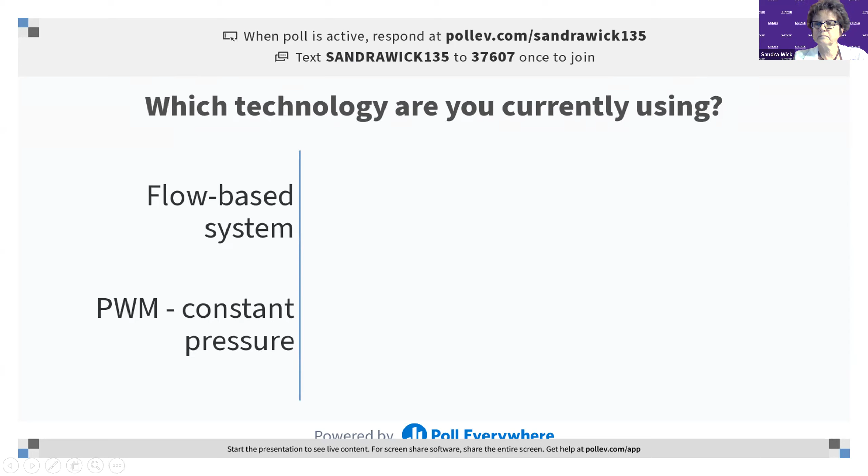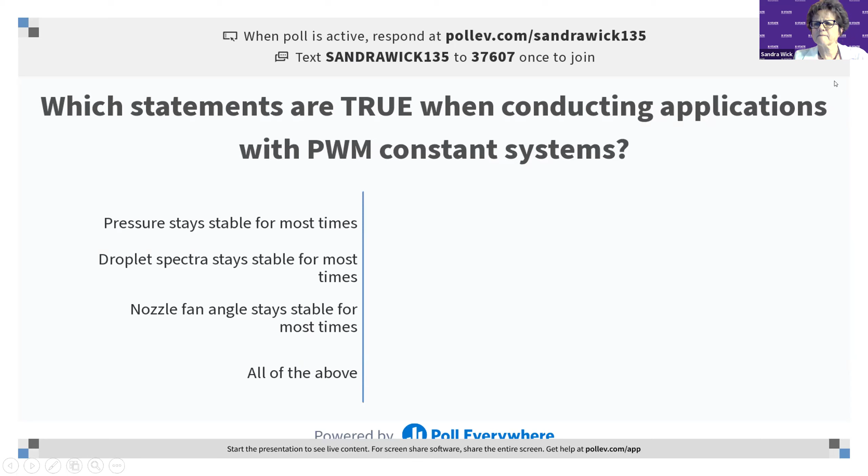So I'm going to get in there and see if I can get this to work here. Join that. Just type your name in. Continue. And then you answer one of those questions. So has anybody found them yet? Keith, are you in there? I'm in there, and I'm going to answer the first one. Oops, I didn't mean to go to the next one. Let's get rid of this. Whoops. I don't see anything coming in. How are you guys doing? If you just want to tell me, is it working or what?

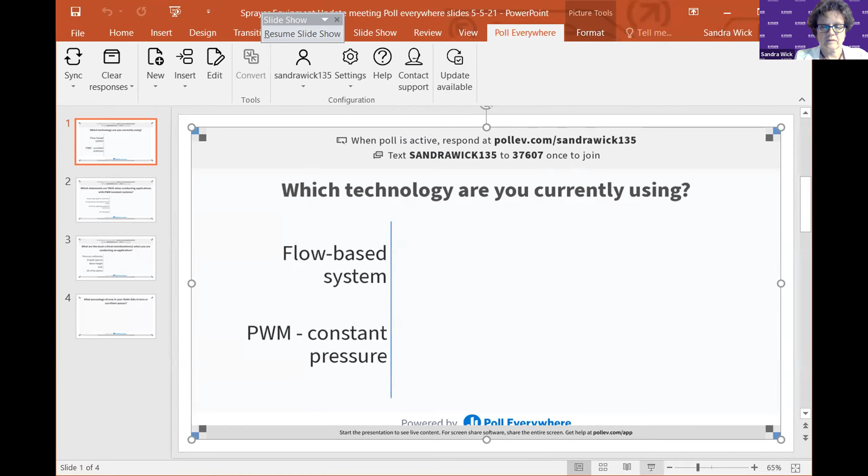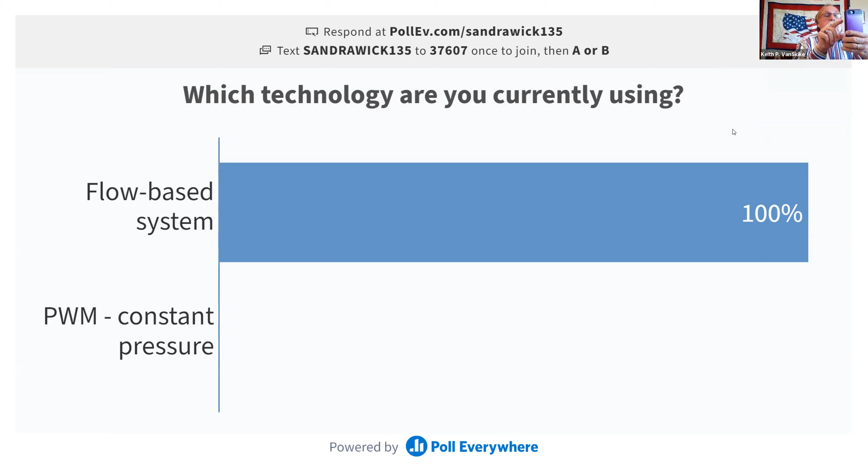Aha! Somebody answered it. I don't know. Activate. There. Now can you guys answer it? I had to activate it. Sorry. Are you guys seeing the screen? Yeah. Okay, great. I don't know if it's telling me how many responses, but I think there's about 7 or 8 people on. So that's how it works.

So it looks like all of you have answered flow-based system. Is that correct?

So I guess with that, we'll go on. I'll clear these responses and unshare. And then if you want to share yours, Ajay. Yes, I will. Okay.

All right. Can everybody see that? Yeah, now you just need to get it in a presentation mode. There you go. Cool. Awesome.

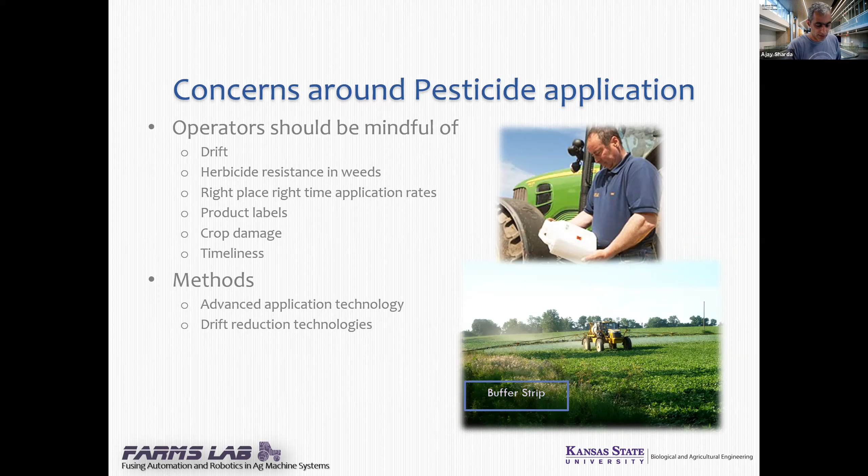Projects. I'm sitting here with the operator, collecting a lot of data, making sure that some of our nozzles on the left side, looking at the screen, they shut off because it's a buffer strip. I don't want to damage all that, and it worked, right? So that was one of the things from that standpoint.

I don't want to emphasize anything from a goal perspective. We want everything going, everything right overlap, all those things. We don't want any nozzles to be off. I want to apply the product at the rate I want to apply, throughout the field.

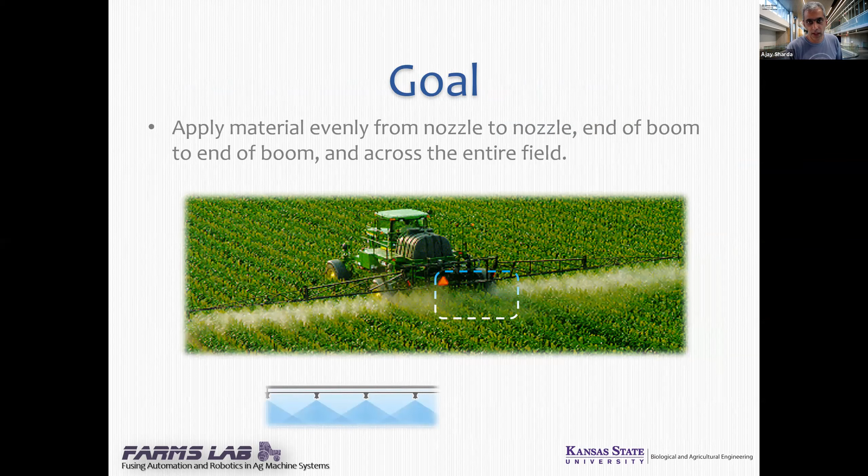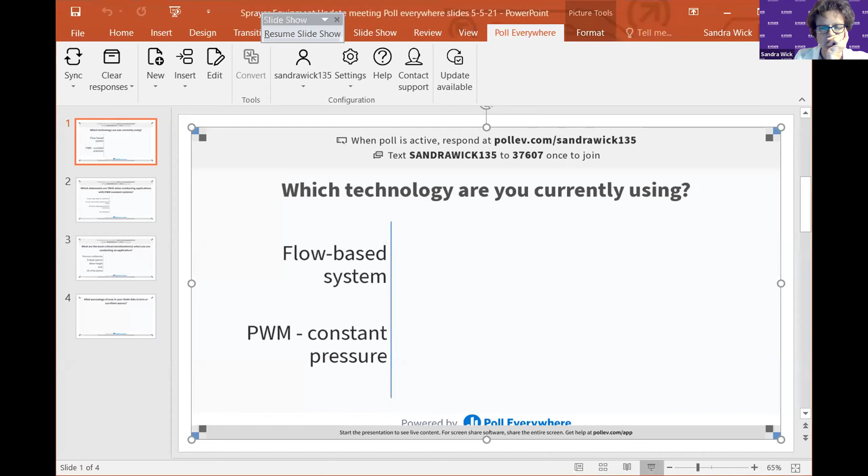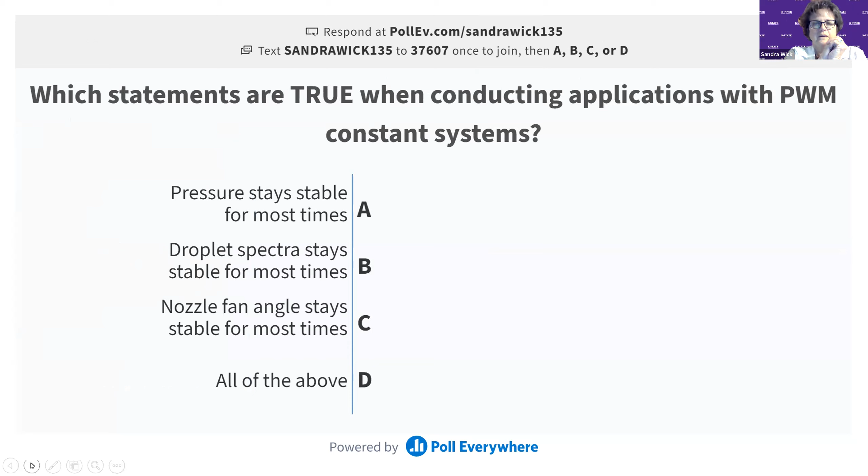So before we go to this slide, Sandra, can you please put up our next question for everybody? Yep, I will do that. So I'm going to have to stop your screen real quick. Please, yep. Okay. And then I will put this up. And hopefully we can get the second one to work. It'll work. It'll work. All righty, let's go up to the second slide and start that. Okay, sorry, next slide. Yep. There you go. So this is a multiple choice. Oops, next one. Yep. This one. Sorry. No, you're fine.

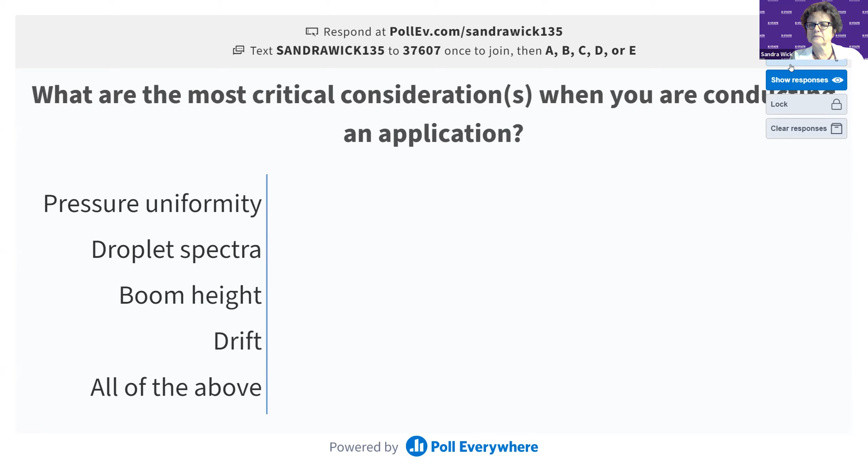Nobody's voting yet. Is it not working? Because I don't see any responses yet. Are you guys getting in? Can you guys hear me? I am not getting in. You are not getting in. Oh, shoot, that could be me. Okay, if you guys just want to put your answers in the chat, how about if we do that? Okay, that's good.

So you could use A, B, C, or D, or you could write it out. So A would be pressure uniformity, B would be droplet spectra, C would be boom height, D would be drift, or E would be all the above, or just type in the answer. So I'm going to stop sharing this since it won't work for some reason, because it looked like some of them submitted, but it's not going through.

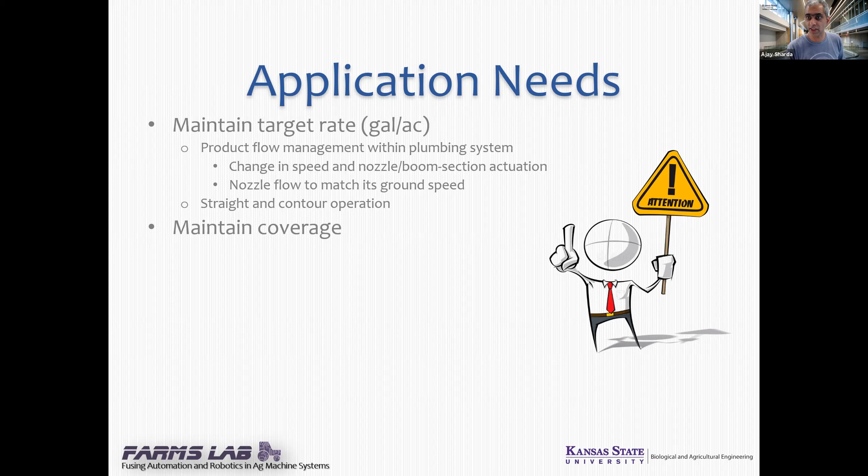The next second thing, to get my money back and all that, is I want coverage, because that's going to give me the control aspect of it, right? Now, to do the coverage aspect of it, the major thing in that is your droplet spectra. The one thing you just said, right? I want my droplet spectra to be right, and that, again, irrespective of speed. Well, you care, but the droplet spectra should not change dramatically going up and down the field.

Now think about it. Droplet spectra is directly related to your application pressure, since we all are using fixed orifice nozzles, and also depends on the overlap and all that part of it, and then to some extent the boom height as well. Now, my question to you guys is, since you said you are using a flow-based system, when I speed up, I have to put more volume in the plumbing system, more product out, and my pressure goes up. And same way, when I slow down, my pressure goes down.

Now that's one scenario in which, if there are ways of doing it, but I may be in a situation where I may not be able to maintain my droplet spectra. That's one thing which can happen. The other thing which is very important is the boom height, which is also part of the coverage. Because if your booms go high, and I really want to show you my arm, when we spray, my boom goes like this. Most of the time, this is my pivot point. And when my boom goes up like that, I'm not spraying straight down, I'm spraying at an angle, and sometimes into the wind stream as well. So all of these things are very critical.

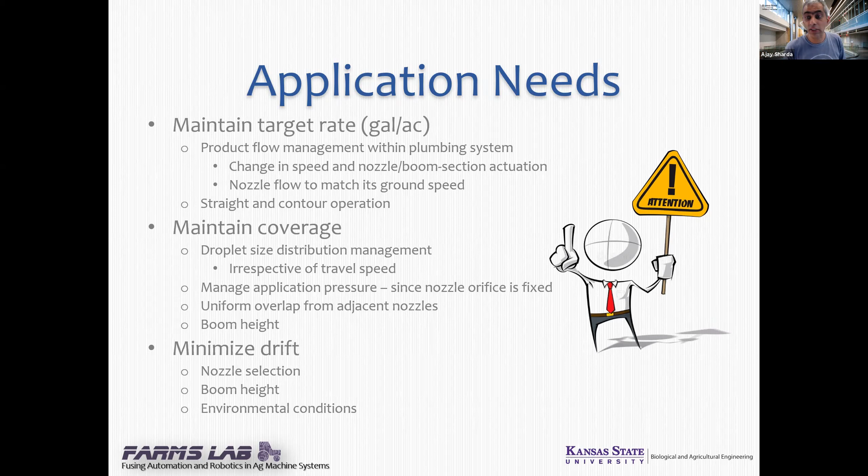So moving forward, very quickly, you guys have seen it. Flow regulation. What I have is I input my target rate. I have my ground speed going in, and my system catches in terms of what is my spray width, how many booms and how many nozzles are spraying. And what it does is it looks at the flow meter, right? It does all the calculation based on speed and spray width and my target rate. It says I need X gallons per minute into my plumbing system.

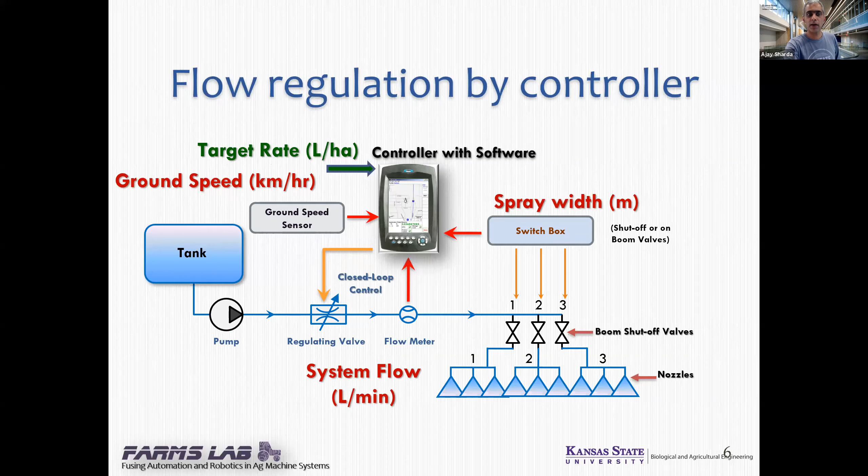And if this guy, the flow meter, says, hey, I'm up or down, then this field computer or ECU kind of a thing sends the command to my flow regulation, which is your proportional PWM valve sitting on the pump, right? That's very simple. That's all what we do. Now, I just want to put it up because we are laying a groundwork for some of the discussion which is going to come along.

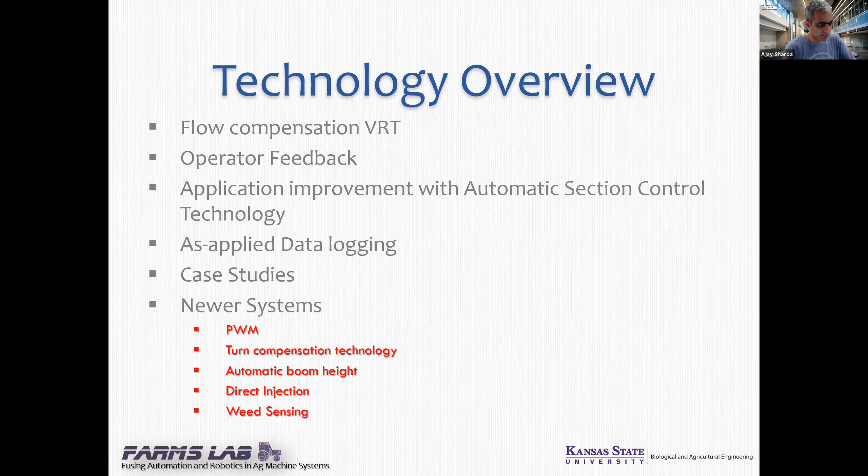Now, I want to show you this slide really quick. Focus on that picture. This is one of the things which we used to use. It is a rate controller for a flow-based system. I have a bunch of things going on. This is one of the sprayers we used to drive or operate. And most of the times when an operator looks at the screen or wants information in terms of what is going on, I look at this monitor and ask for information, what's going on.

And if you guys all are with me right now, the only piece of information which is available right now from these systems is, am I on target or not? All right. If I was supposed to do 15 gallons, am I doing 15 gallons or not? Or it will say you are at 15 or 14.5 or 13.5 or 15.5, something like that. So that's the only information which is available from these systems as of now. Now, some of these newer systems which show you the coverage map in terms of how you are spraying start to add some more component to it. But this is my source of information most of the time.

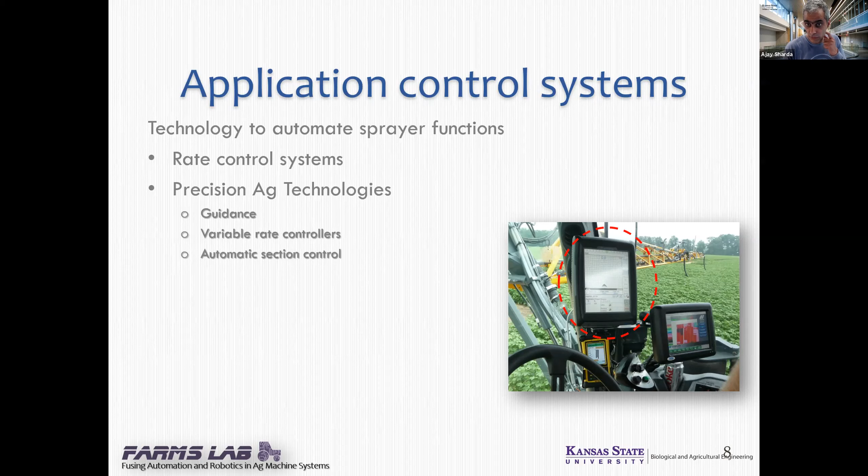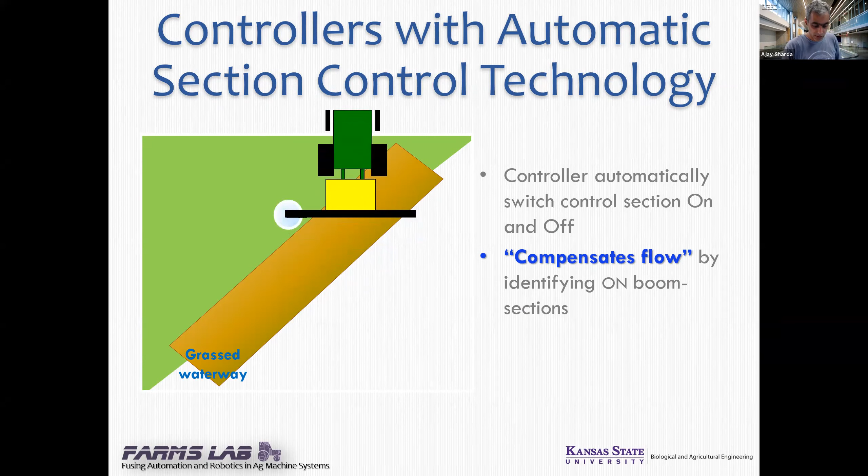Now, we won't touch much more on this thing, but I really want to emphasize how much automatic section control has come along. It is such a benefit in terms of automatically shutting off the control sections on areas which you have already sprayed or do not need any application, whether it is buffer strips, grassed waterways, and all that, so that you can minimize double application or waste of that product.

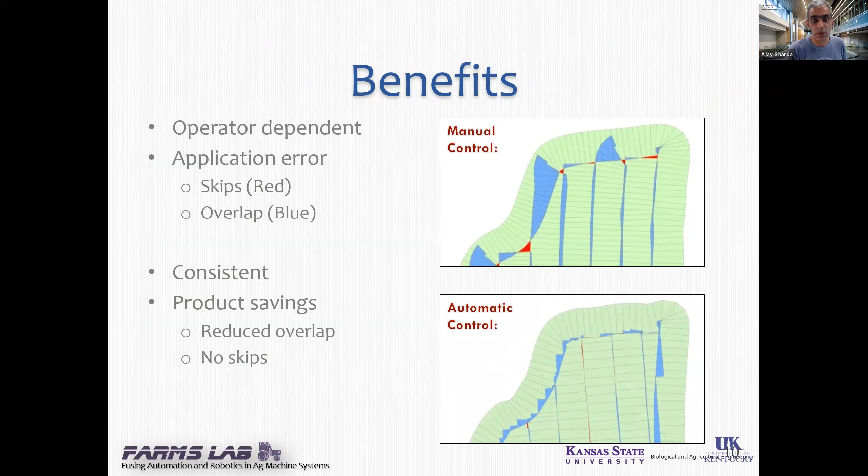Now, application data logging. All of these systems are giving a lot of data. All right. But I know, and you guys know, how much work and how much data we are handling on a day-to-day basis. But don't forget, you have this data in your back pocket, which can show what rates you really applied. Right? You can look at those things.

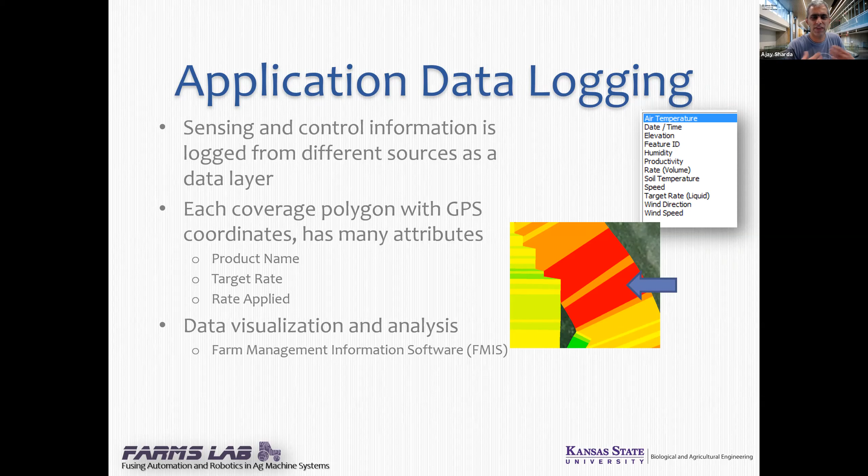You can look at what were your speeds, because what you can do by doing that is you can start to manage how your operators are driving. Are they driving too fast, too slow? What are the speed ranges and all that? And you can show this data to them to kind of educate how to implement this technology in the best possible manner.

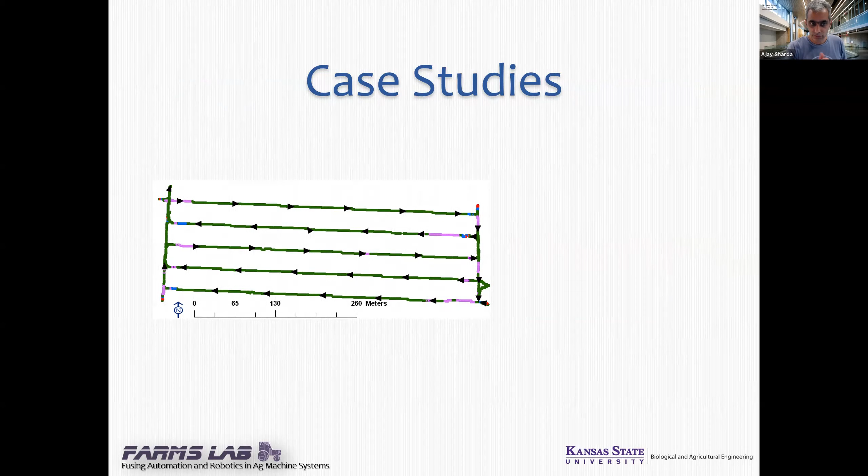All right. Now, getting on to some of the discussion I really want to do with you guys, I'm going to show you two fields. One field is a rectangular field, and another field is a more irregularly shaped field, and has a couple of electricity poles. There is a sinkhole here, a couple of grass waterways, and all that stuff.

All right. Now, what you are seeing here is the extent of off rate, meaning how much off I was from my target rate. Many people say different things based on talking to manufacturers and all that. People say that if you're within plus or minus 10%, you're fine, right? If you want to do 10 gallons, if you're above 9 and below 11, you are fine. You're in that range. Is there a kind of a margin in terms of improvement? Yes, there is. But here we are now.

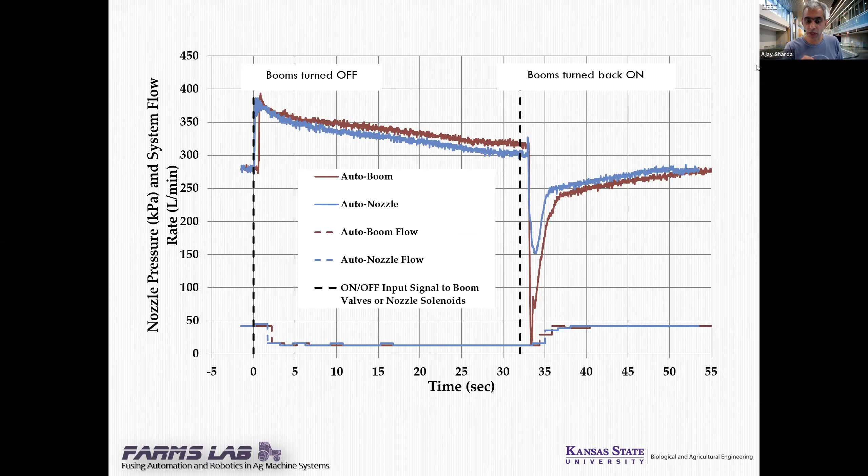Then whatever the pressure you want in that boom, you're never there. Say, for example, you want 60 there or 40 there or 30 there. It takes a while to depressurize and it takes a while to repressurize your plumbing system. And those are the situations where we see those under and over applications going on.

Now, granted, this is one system. There are other systems which are capable of doing better than that. But again, still there's a significant amount of time where I was doing over and under application. And even today, we will be talking something about the PWM and how the systems have really improved. This trend will still be the same.

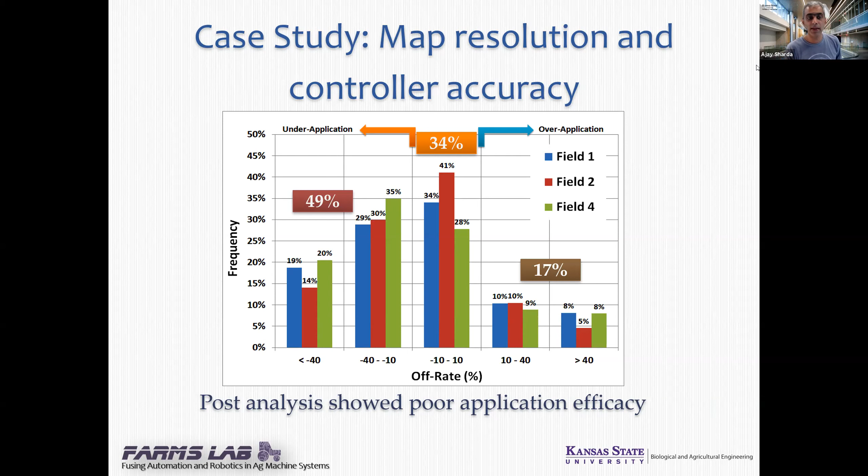That means your good application will go up, but you will still do a higher percentage of lower application versus the higher application. So we all know under application has a direct role to play in terms of controlling weeds. That's one way of managing the population of pests and everything. And if I don't do it, I am giving them an opportunity to be resistant or not be controlled from the critical limits to not get any yield penalty from that standpoint.

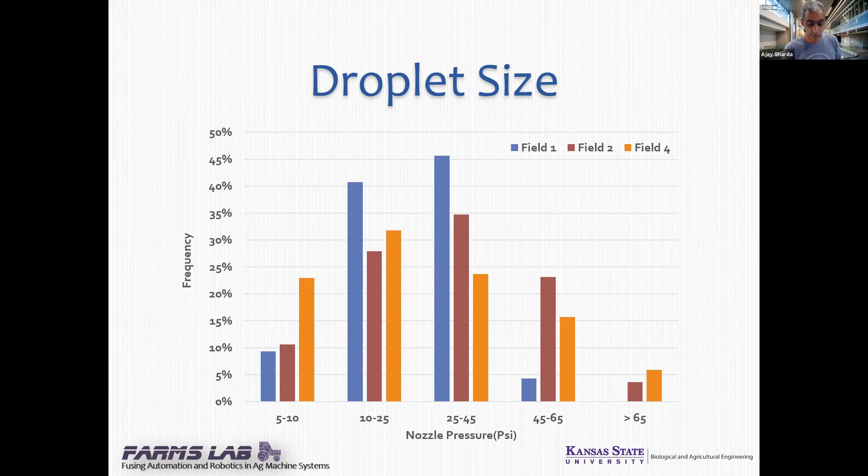But the moment you go out of that range, if you want medium droplets, you will either fall into the very fines, which is your higher pressure, or you will fall into the coarse, if you are very low pressure, right? So these are some inherent things which are related with your flow-based system aspect of it.

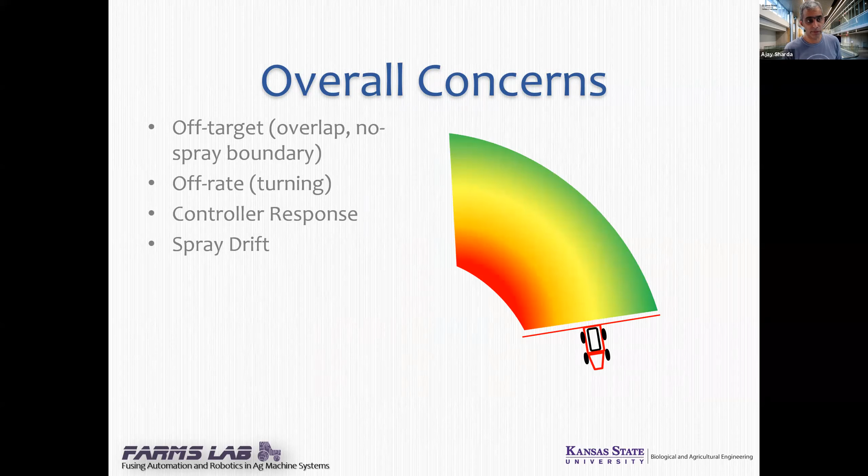Now, all of these concerns, whether it is off target, which is my overlap or no spray boundary thing, or my off rate aspect of it, this is fundamentally not possible in our flow-based systems when I turn, right? And we will talk about how much turning people do typically in fields. When you turn, your outside boom is much faster, your inside boom is much slower. You are going to do a very low and very high application from outside to inside. All right, and that's going to impact how you'll be managing and implementing our application. So this is definitely not possible.

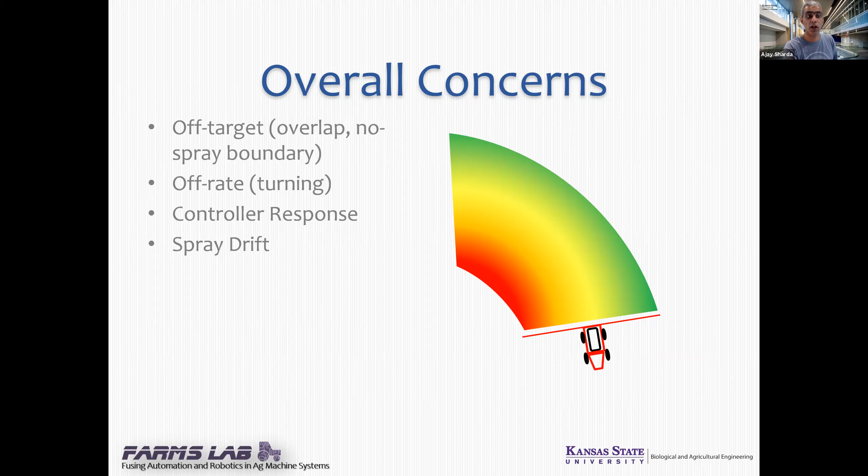We've seen some controller response where it takes some time for the rate controller and everything to bump up the volume in my plumbing system and bump down the volume in the plumbing system as well. Think about it. When you suddenly accelerate, or when you're doing some section control, suddenly half of your booms go off. How quickly do they go off? They go off within a couple of seconds. We're talking about 1 to 2 or 3 seconds.

All right. Now I'm asking my plumbing system to reduce the flow rate from 30, 40 gallons per minute to 20, 25 gallons per minute. It's going to take some time, right? So these are other things which are definitely related to that. And we've also seen that the way we apply product at those speed ranges, I'm going to have some droplet spectra concerns as well. So we've talked a lot about it, but on the flip side, I can do better, and the way I can do better is

selecting a nozzle which gives me a wider pressure range to maintain my droplet spectra. That's number one. Knowing what my speeds are to be in that pressure range, not trying to go too fast or too slow, so that I don't enter into situations of going out of my droplet spectra. That's the number two thing. And then obviously in terms of the controller response, my recommendation, that's my personal thing, is I would rapidly accelerate and get to my speed. I won't do slow acceleration, because every time you are doing smaller step changes in speed, you are trying to get your control system to work to slowly get there.

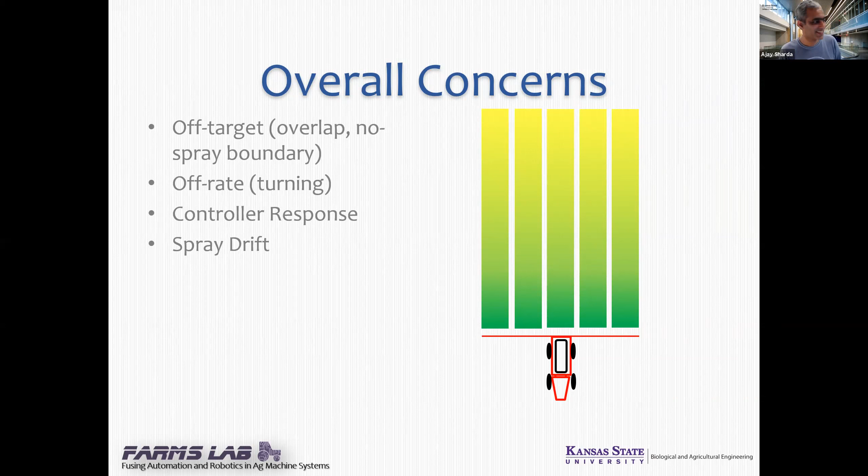And I can call you guys. We don't have many people. Craig, Robert, Dean, anything you guys think is on your mind? No? Are you guys still with me? Yep, I'm still here, Ajay.

All right, cool. So the next thing which I'm really excited about is PWM, or pulse width modulation technology. You guys have definitely gone through some trade show or seen this technology at one of the field events or a dealership or something like that. But the major thing is that now I have taken a little solenoid and put one solenoid in each nozzle body.

And so the way this system works is, the system pulses a certain number of times a second, right? Most of our systems are 10 hertz systems. There's a Deere system, which is a 30 hertz system. So when I say 10 hertz system, this system pulses 10 times a second. And within each of those 10 pulses, the longer it stays on, the more flow rate it can put out. So for example, if it stays on for all the time in that 100 milliseconds, you are putting the maximum amount of product. If it stays on for 50%, you're putting 50% of the product.

Now, very important thing, guys, here. Think about the entire flow control strategy. I have a flow meter, which is telling my computer how many boom sections or nozzles are on. It tells my flow control valve to bump up the volume. It again checks with the flow meter and keeps adjusting, right? All of those things happen. And then everything has to translate from upstream to the nozzle.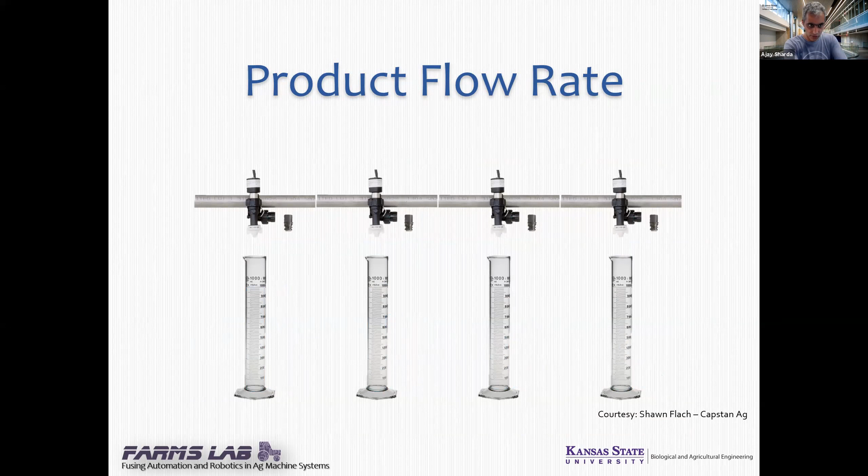Now, is that right or wrong? Let's see some of the information we have gathered over time. This is a quick simulation or illustration. So you'll see these jars. The first is 100% duty cycle. So if everybody is spraying for the same amount of time, a 25% duty cycle is going to put 1/4 of the volume, 50% is going to put half, and 100% is going to do full, right? So I can just change the duty cycle, and that will change my application rate.

But think about it. This is all based on speed, and what this gives me is that irrespective of what my speed is, I can maintain my 10 gallons per acre all the time, right? That's the expectation from this system. Now, if you guys remember, we talked about how the pressure changes if I switch off half of the boom or a portion of the boom and all that stuff, right?

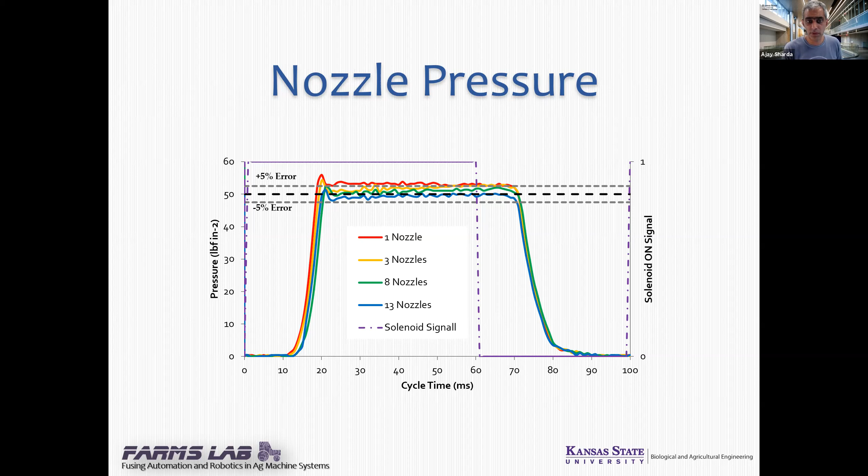One of the important things we learned from some of our initial lab tests, and we will see some of the field data, is that irrespective of how many nozzles are on, you always manage the pressure very tightly, within plus or minus 5%. That gives very, very high confidence going forward. If I can do that, I'm already doing a lot better. I have a lot of flexibility in terms of what I can do.

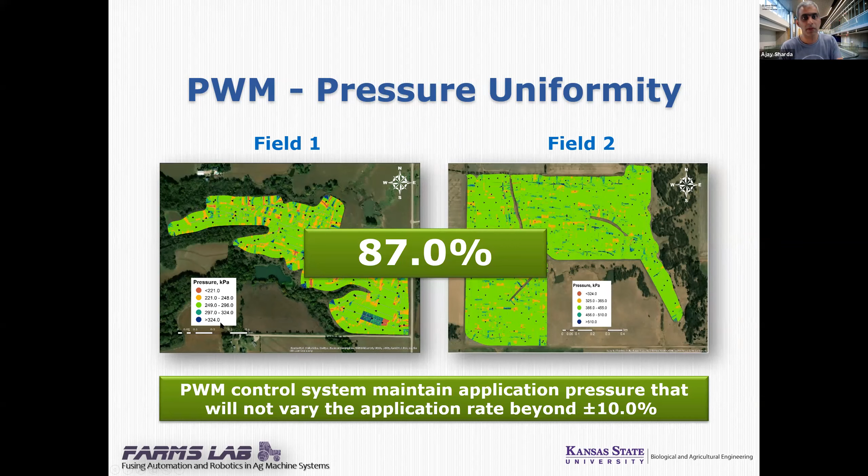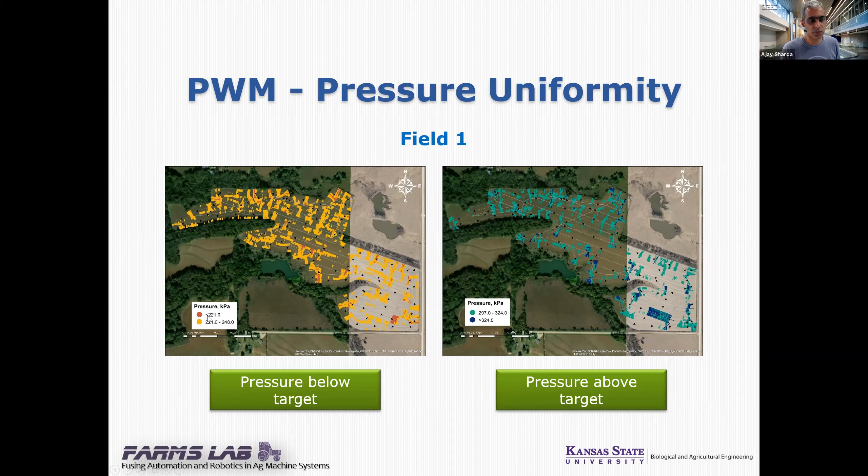So there were a lot of regions here where you applied over and under, but in most of these areas, whatever the 10 or 12% area was left, you can see in these percentages as well that you have slightly more under application than over application, but very few areas which showed beyond 10% of error, right? Which is such a big deal moving forward.

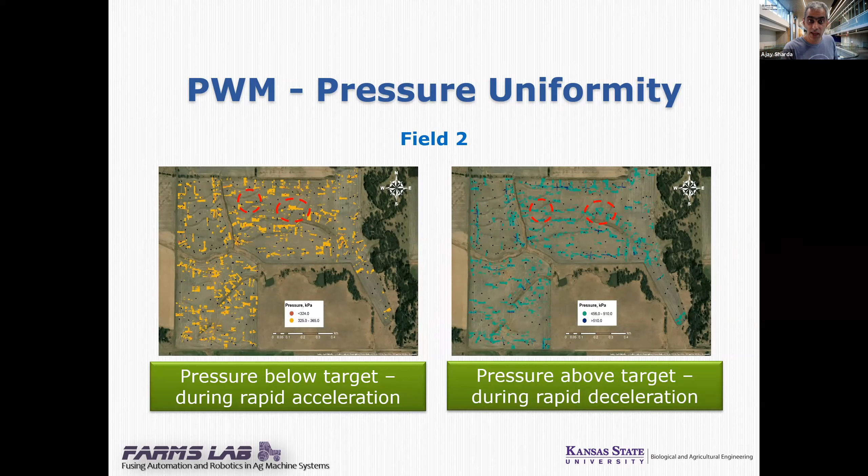Similar things happen here, and if you match what my speed was doing, every time I was slowing down or speeding up to go over the terraces and all that, that's where these errors were happening, because I was rapidly slowing down and rapidly speeding up. Similar things to what we have seen in the flow base, but at a much lower magnitude. Now I want to ask this question, and this is a question for Sandra and Keith as well. Have you ever heard about what pressure coefficient of variation is?

We have heard about coefficient of variation in terms of my seeding. What is my singulation? When we are planting, we always talk about coefficient of variation. And I'm pretty sure you guys plant and all that. From a planter perspective, I want my COV or coefficient of variation to be definitely less than 33% for good seed spacing, or from good systems, I expect them to be somewhere around 20%.

All right. So have you guys heard about what the pressure COV is? Keith, Sandra? All right, no. All right.

So I want you guys to start thinking about this now, because when we say coefficient of variation of pressure, in my previous slide, we've seen what my pressure ranges were. Now, from a COV standpoint, I want to know, for each of my booms, or all the nozzles within each boom, where does the pressure stand? Because my goal is to maintain whatever 50 psi here in this field was, but I want that 50 psi to be all along the boom, consistent at all times.

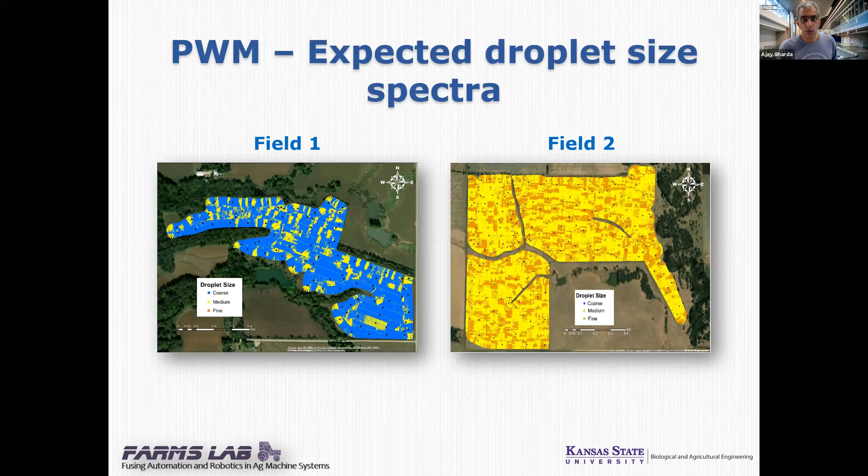So now what I'm going to show you is another slide here. Remember we were talking about droplet spectra. I purposefully skipped the last slide for a certain reason, but if I select the right nozzle, now I selected a right nozzle in this case, which gave me a 20 psi range to always stay in my target pressure. And you have to select a nozzle which has a 20 psi range from your target rate. Say, for example, 50 was my target. So somewhere between 40 to 60 psi, I should always get the same droplet spectra, or if it is something wider than that, even better.

So if I selected the right nozzle, with everything I did, I wanted to maintain medium, and I always maintained my medium droplet size. So think about this: switching to my PWM, I have a 10-mile speed range. I can manage my pressure a good 90% of the time. My pressures were consistent from nozzle to nozzle, from end to end on the boom, within 5 psi all the time. So if everybody is going up and down a little bit, everybody was right there. There's nothing like one was too high or too low, right? So that's very important from each boom perspective.

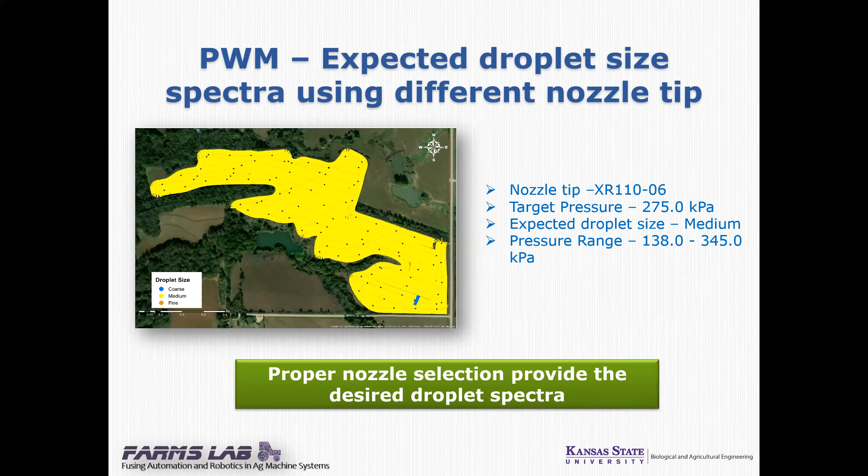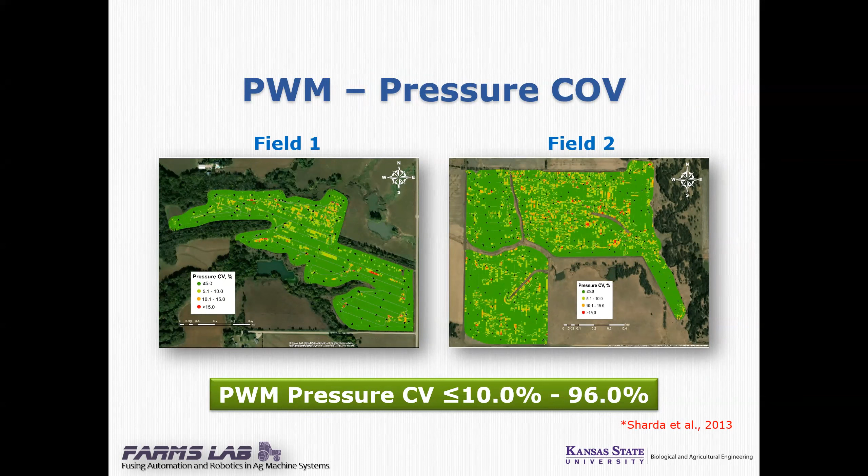Yeah, it's Keith. So really, that variance, it is repeatable for each nozzle going across there. I mean, that's what you're getting at, is what, 96%. That's very, very similar and repeatable all the way across, right? Absolutely.

Yes, sir. And the way we did this is that we put two pressure sensors in each boom, and we put those pressure sensors strategically, one right at the T where the product gets into the boom, and one pressure sensor towards the far end, just to capture where the product gets into the boom and all the way to the very far end, in terms of seeing whether the pressure was building right or wrong, right?

So we calculated these CVs on a boom section by boom section basis and combined all that together. So everything looking together, this is what you have seen. The field on the right is 140 or 160 acres. The field on the left is 70 acres. This data is at 40 hertz, means I'm collecting 40 samples of data every second.

And one more thing I want to emphasize is that this is a very high resolution map. This is a map which has been plotted for all 36 control sections in that sprayer. So you are seeing every single section's behavior in this map. I'm going to show you another slide here. So this is one example, right?

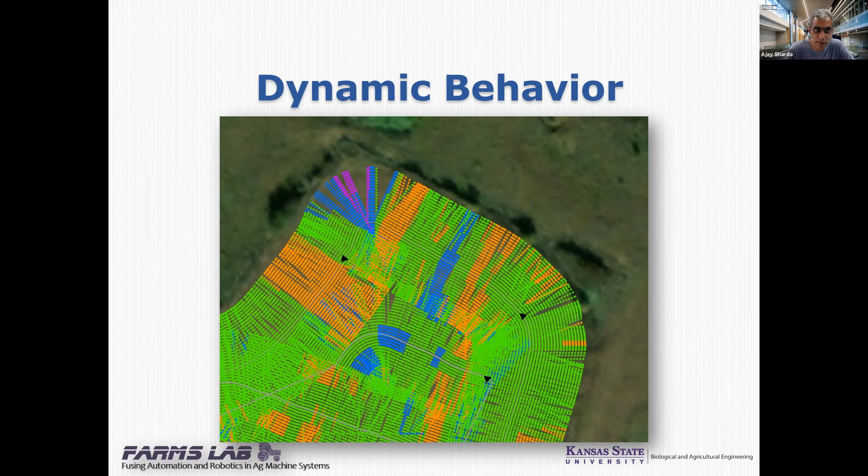You can see on these turns that it turned on here, but there was some gap in the distance when it turned back on because the boom moved too fast. And my duty cycle was definitely not matching up and all that stuff. And we won't go in that detail. What I want to quickly emphasize is that I only want to show this slide because I want to talk about something else. We are shortchanging on time here.

On a flow-based system, we cannot manage that kind of a speed, because if we manage that kind of a speed, we will go from a very high end of pressure to a very low end of pressure, right? We will be in areas which are below 10% and above the 10% as well. So this is what is happening in this case. You can do it, but then you have to really manage your speeds well. You cannot drive that fast, or you cannot drive with that speed range.

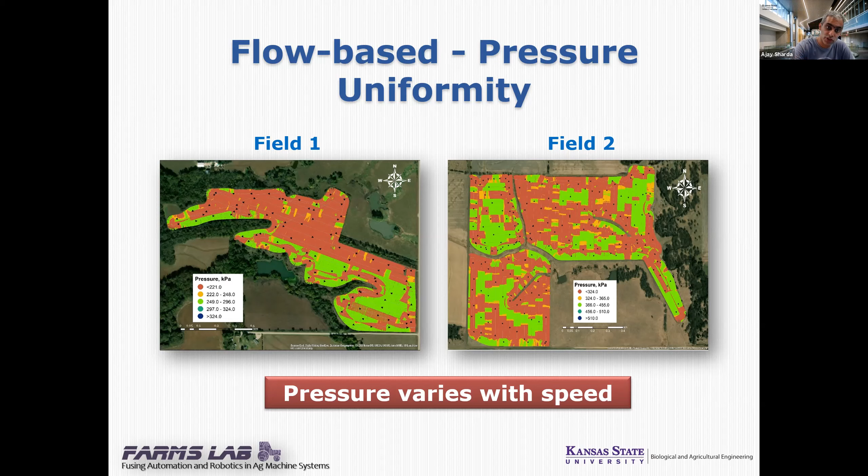And if this is the case, in terms of pressure, you won't be able to manage your droplet spectra as well, because you're going to go from fine to medium to coarse based on the nozzle we selected in this case. All right.

I'm sorry I showed this. So Sandra, can you ask the fourth question to everyone? It's time to ask question number 4. Okay, so I'm just going to have them put that in the chat. Whoops, I used the wrong one. Stop share. Let me find my PowerPoint here. I don't know what happened to that, but that went down.

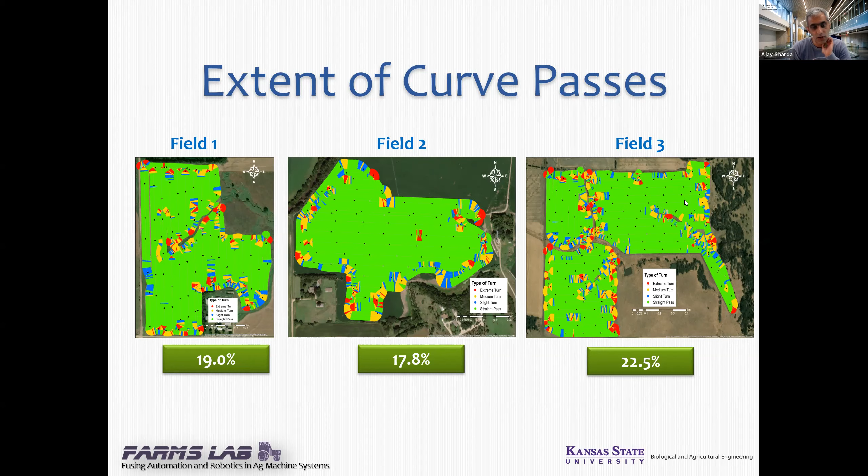So we have to be very cognizant about what this technology is giving me in terms of turn compensation as well. We haven't done much work on that, but my guess is that these systems are managing duty cycles correctly as they are going around. If that is the case, then I am managing my duty cycles all around these curves and keeping my application rate consistent, not only in the straight passes, but also in the curvilinear passes as well. All right.

Now, this is what you will see in terms of speed differential. Extreme turns: the inside could be 2 or 3 kilometers, and outside could be 45 kilometers, right? That's a huge speed differential. Even at your 20 to 50 meter turn, you still have anywhere between 34 to 15. So that's a pretty large speed differential as well. So big picture, we cannot do that.

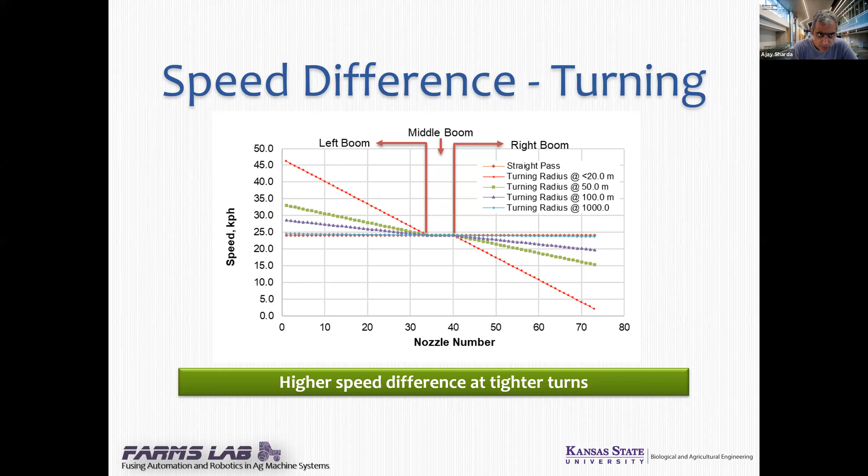All right. I quickly want to wrap up this thing. From a comparison standpoint, you can do good with flow based, but you have to make sure your speed is in a good range, your pressure doesn't vary too much, and your droplet spectra stay the same. But there is limited control, because everything is controlled by your speed. On a PWM, you get a wider speed range, and you keep your pressure constant. We can manage our droplet size. And we have also seen you have an advantage on turns.

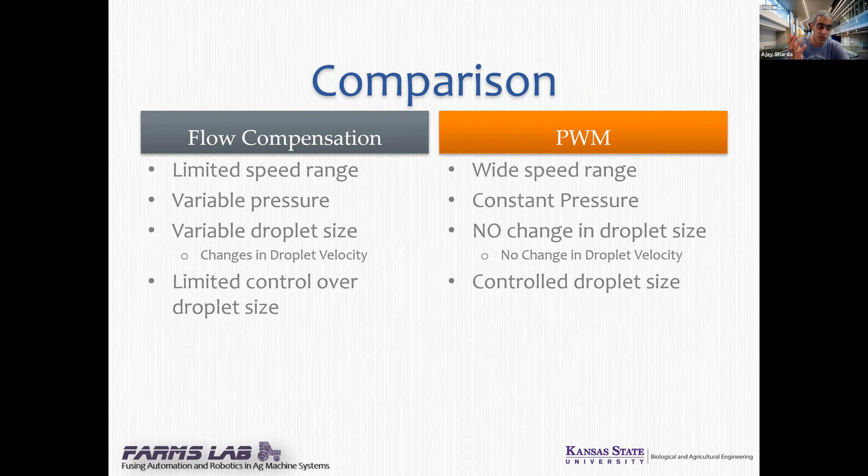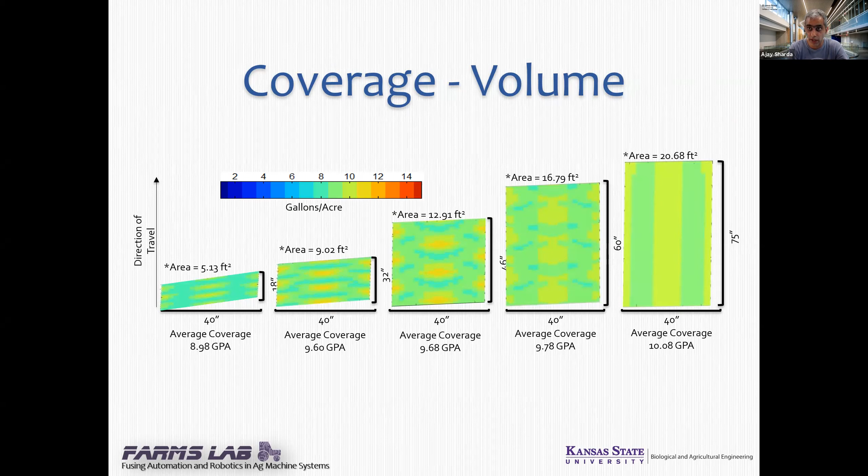We have seen that from that standpoint as well. This is just a simple, very quick thing. We haven't done much. We are on the cusp of doing something in 2 weeks, which will be all in the field. But some of our lab studies have shown that if you stay above 50% of the duty cycle, your coverage is going to be much better.

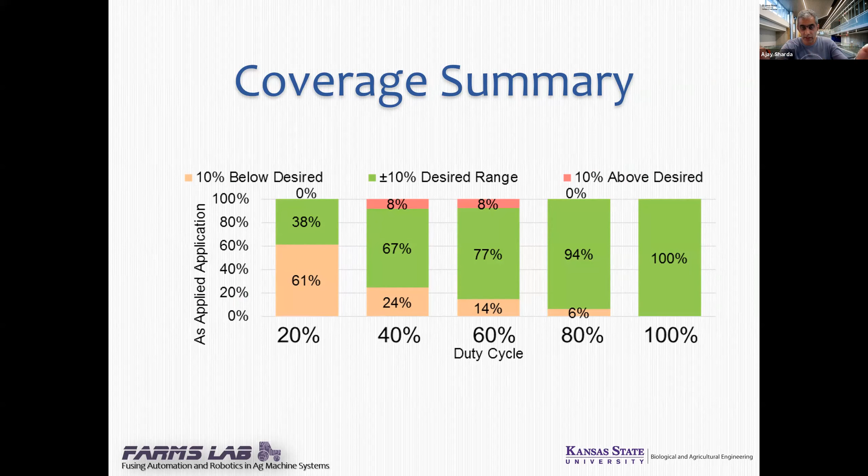But I'm eager to do the field study, which we are planning in 3 weeks, and we will know a lot more about the difference in coverages at different duty cycles, plus 10 hertz systems, which is everybody else, and the 15 hertz system that Deere has. So we'll try to share some of those things.

The last thing I want to talk about: boom height. Very important, guys. We have to make sure our boom heights are always consistent. If they go up, we are going to be out in terms of overlaps and coverage. And like I said, always remember, my boom goes up and down on a pivot point. So if it goes up like that, I'm spraying now at an angle versus down, right? So suddenly you start to lose a lot more product. It's not going to end up on target.

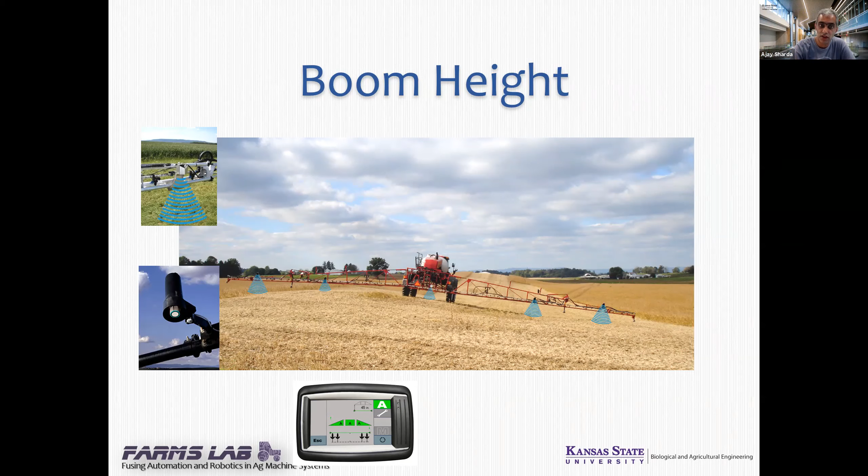And there are a lot of good presentations from Dr. Greg Kruger at UNL which talk about wind speed as well. An additional 5-mile wind speed can blow your droplets a very long distance. We're not going to talk about that. But the last slide for everybody: what you see here is I mounted 3 different wind speed sensors, and I mapped them side by side.

So this is my one pass going up, which are these colored things, and this is a pass coming down. This was my wind when I started in the morning, which was northeast. But within a span of 4 hours, it completely flipped and started blowing southwest. And now when I was going southwest, with the speed of my sprayer chassis and the additional wind component blowing from my back, my effective wind speed was 23 miles per hour. And when I was going up, I was in the mix of 5-7-ish miles as well.

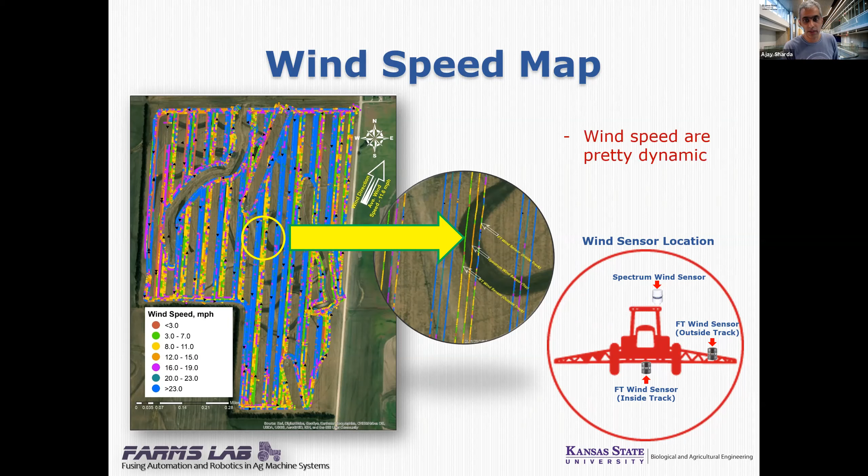So one pass, I do a really good job on application and expect to have good coverage. On the other pass, I have no idea where my droplets are going. 5% landing on my crop or 10%, but it's all over the place. So this is something we have to live with because of the way our fields are set up, but we have to be conscious about wind. Wind is one of the biggest factors for drift. If you add any kind of poor boom height control, it could be really detrimental from that standpoint.

So I would really want to acknowledge some of the people who have been helping a lot on the back end: CNH, Raven, and TeeJet. Most of their help is in terms of technical expertise, so that we can tinker around in their systems and get some really good quality data for you guys.

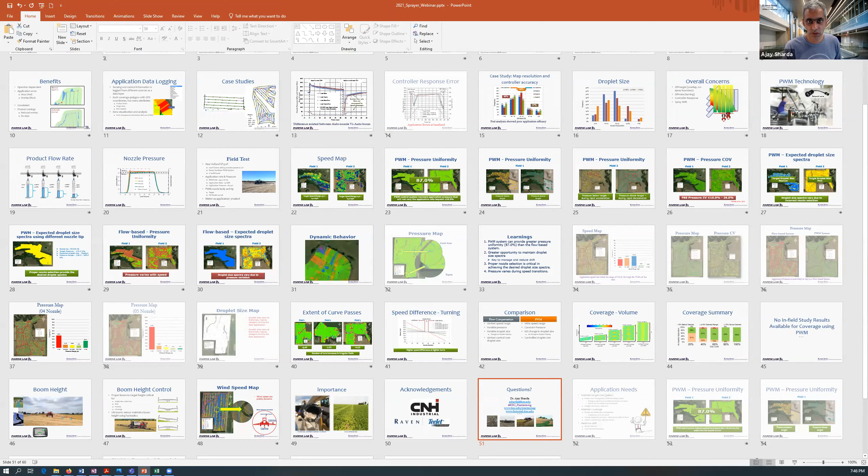I do have a quick question, AJ. A lot more producers are spraying their own fields, getting their own equipment. And I know that you talked about nozzle types being very important. So there isn't a one size fits all, is that correct? So for each chemical, they have to get a different nozzle? Right. So there are two factors to it. I am not a nozzle guy, first of all, I really want to throw that out.

The turbo TeeJet nozzles are probably more popular. People use Hypro, and Hypro makes nozzles for John Deere and everybody else. But those flat fan nozzles are really popular. Those are for a lot of the application aspect of it. And then there is a component of twin fan, which is spraying into the crop backward and then forward moving. So it tries to cover the canopy on both ends.

But yes, Sandra, your question is absolutely right, because my nozzles all have to be picked based on my chemistry. So if this cocktail needs a medium droplet, then I can use that nozzle for any other cocktail which needs a medium droplet as well. But the only other caveat will be, do I want to move away from flat fan to something else? My guess is most of the time we use either flat fan or twin.